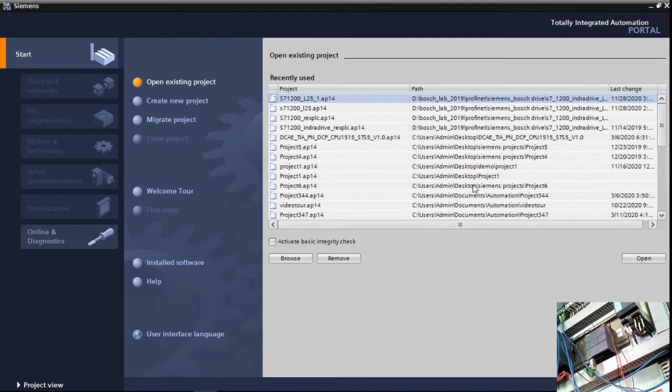So for programming S7-1200 PLC, we use TIA Portal version 14. It's a Siemens software for programming Siemens controllers. So in that we are creating a new project, and this project name we keep as 1200_L25.

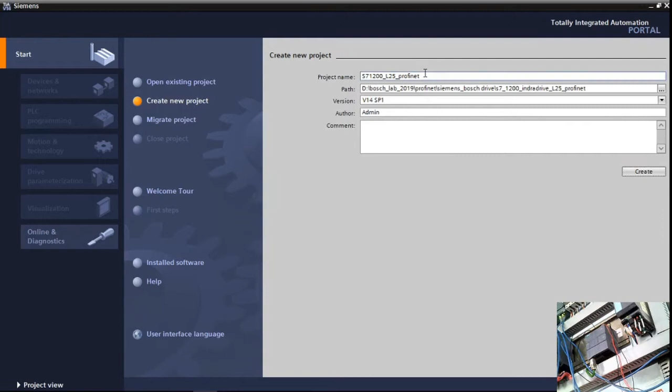So we are connecting a Profinet, then create project with this name. Please click OK, and we'll keep this as Profi. So now we're creating the project.

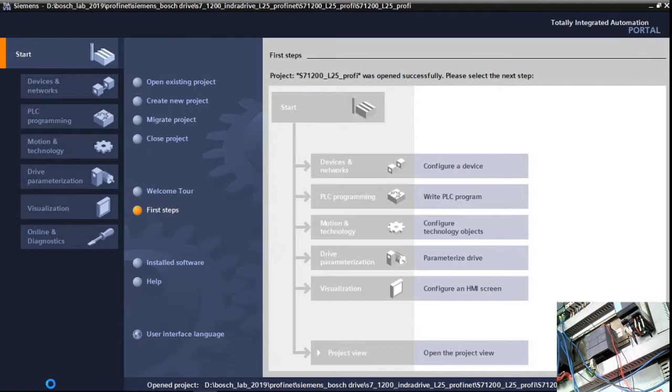So now we go with the project view. We need to add a new device, so now we need to add a 1200 PLC. Under 1200 PLC CPU, our CPU is

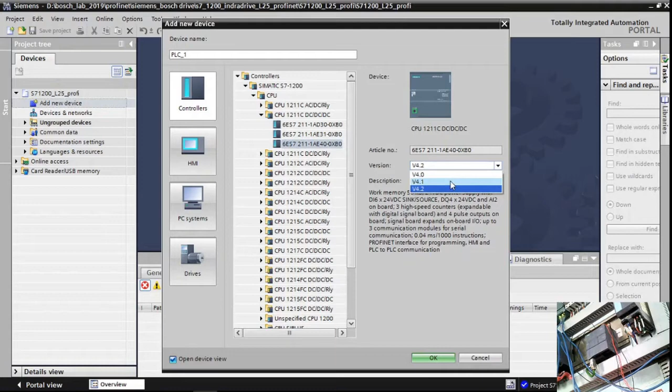1211C DC/DC/DC. This first DC is the DC supply for PLC, DC input and DC output. So select our CPU type number, this one. This will be our firmware, version 4.1. Click OK, and the device will be added in the project.

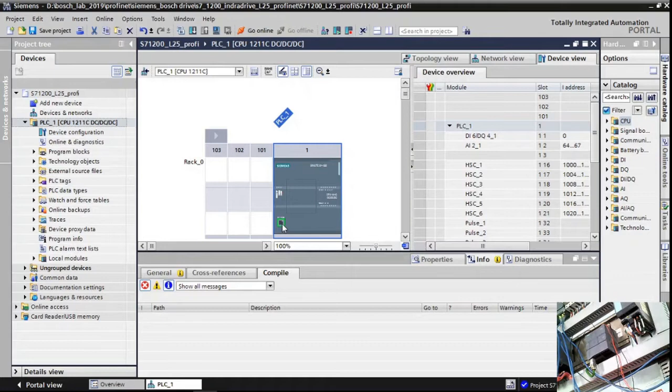So to see the compatibility between our project, the device selected in the project and the actual device, we need to download this into our physical hardware and see whether the selected type number is compatible with the actual one. So for that we need to give the address for this PLC.

So this one is a default address, so now we'll change this, because we are connecting all the devices in a network. So we have a network address of 126. So we can have our own address, but it must not conflict with the other devices.

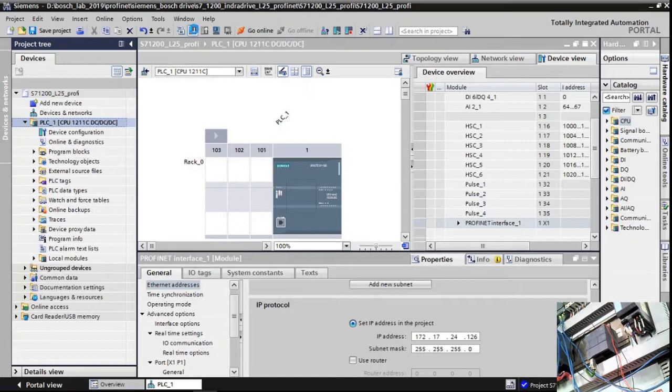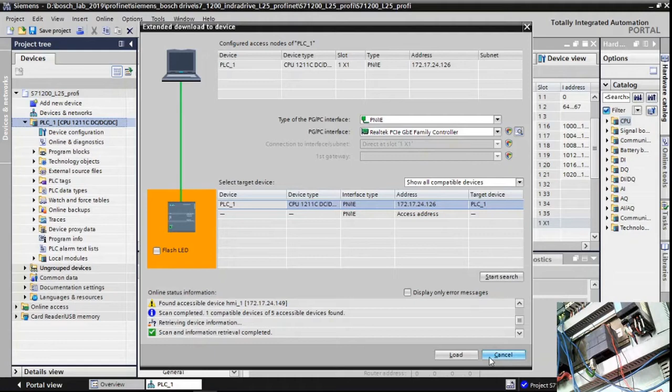So just select this PLC and download. It will ask to search for this PLC. It is 1200, so we will start loading.

Before loading the program, it will ask to stop. We need to stop all the PLC, then we need to load, and then give finish.

Now if we go online, it should show like this. Everything is green. If anywhere some error comes, it won't go online, it will show the error.

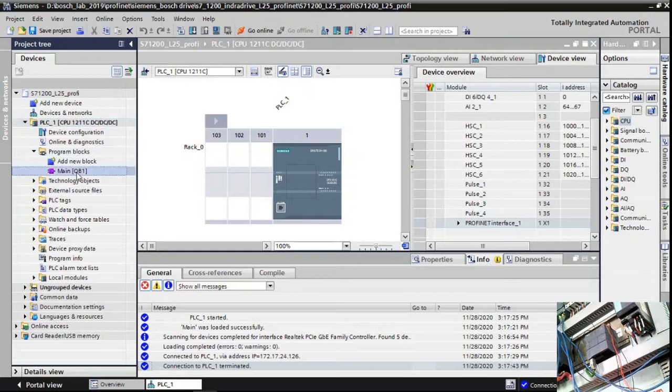So then go offline. In order to do the programming in the PLC, we have PLC program blocks. Go to the main block. In that main block, we have contact, coil and functions. Using that, we can program here.

For example, we use some input and give some output. So this one I can give as M, directly program here M 0.0. Then here I want to switch on some Q 0.0.

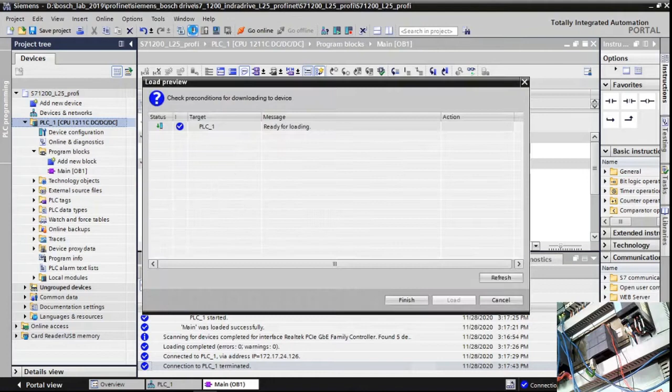So just after this, we can download. Since the device is already loaded, it won't go for that again, as configuration is already done. So it will load only the program and finish.

Then this one is monitoring. Just give this, it will monitor the input output. So this one, we can write a value here. For that we can see the modify: control F2 is from 0 to 1, or control F3 is

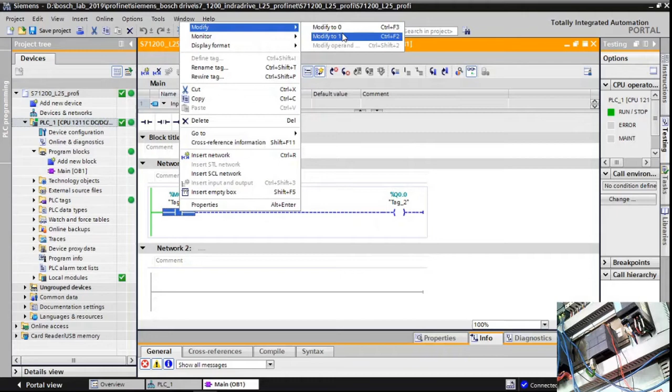from 1 to 0. So if I give control F2 or this one, now see the output is on, right? The PLC also shows the output on. Just this one, control again, PLC network with the

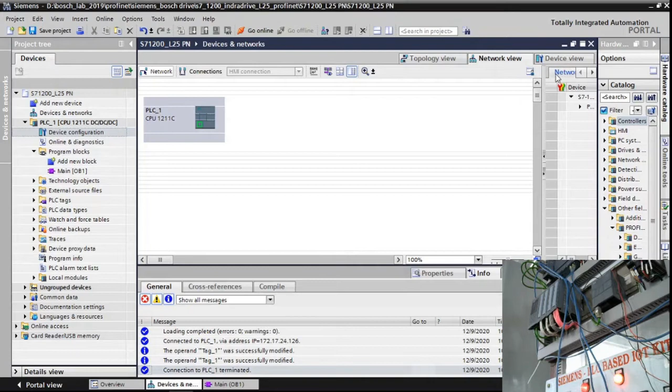1200 PLC. For that, in the network view, we need to add the Profinet device. We use the L25 PN device and we will connect both. So in that, we connected both.

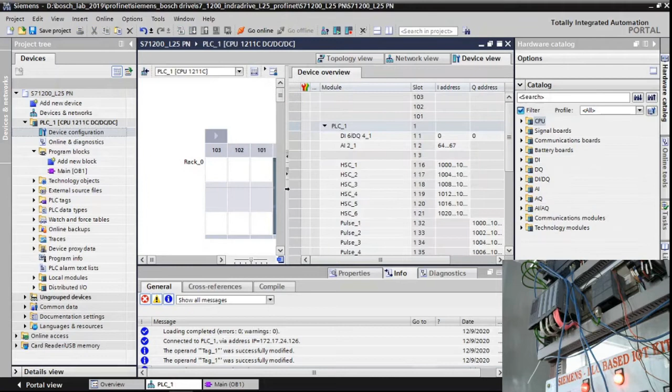So this one, just will check the IP address, whether this one is already having IP address of 126, and this one we can have IP address of both, but they need to be in the same series. We change this to 125.

So then, once all this is completed, we need to download the program. Also we need to add some head module here. Just a double click and we add an input module, this output module. Sorry, it would be added here.

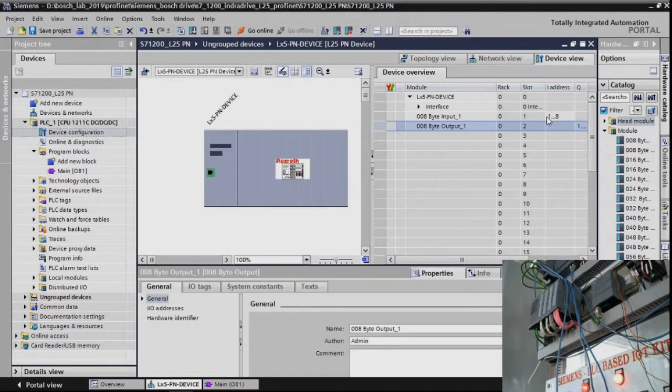So see here the address of the input and output module, through which we are going to communicate with the Bosch PLC. This is 1 to 8. We have a range of input addresses, first byte 8 bytes. Here output also starts from first byte to 8 bytes.

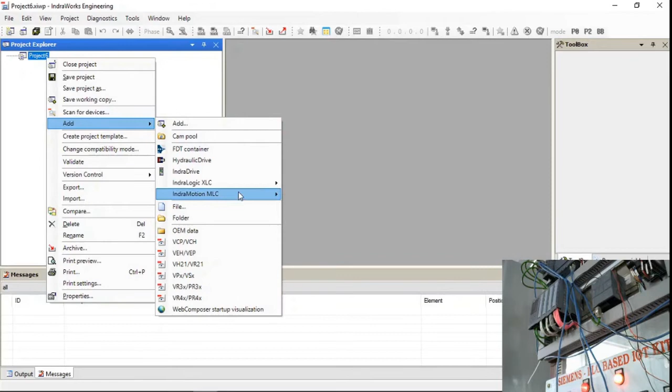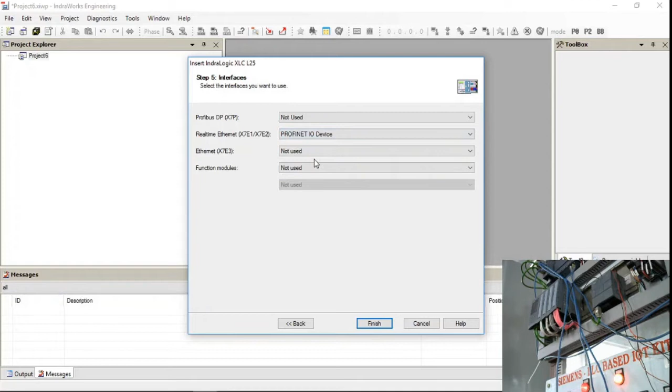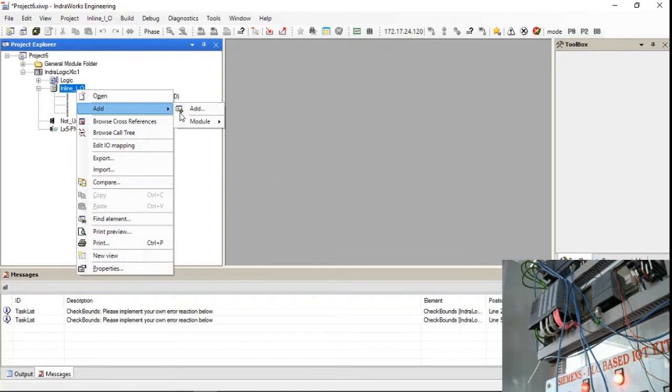Then we'll add all the models. Add model. Then we'll add module DI8HD, then add module DI8HD, then add module DO8HD, then analog input model 2, then analog output model 2.

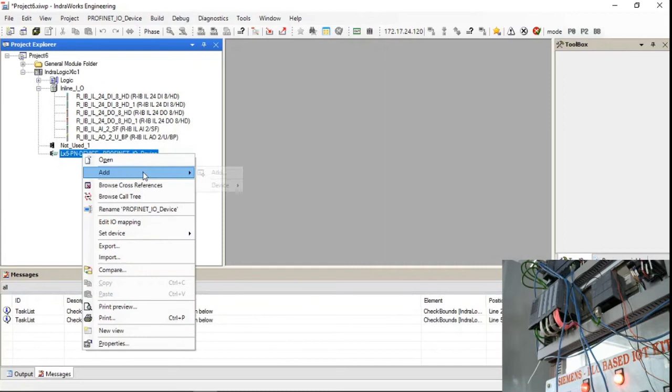So once all the models are added, then the Profinet IO device also we need to add. Here it should be output, next this should be the input. Okay, output, input. So here, this one is like this.

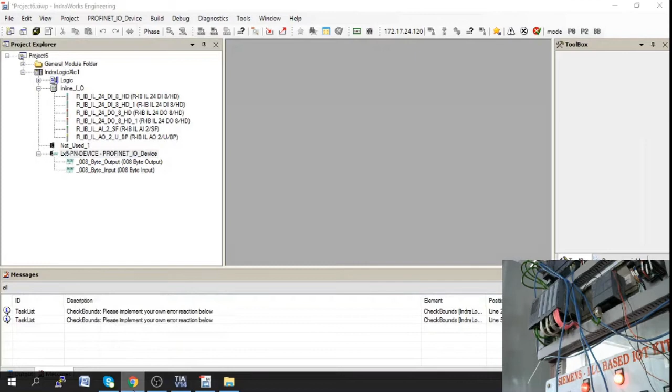This will be Siemens S7-1200. This will be Bosch Rexroth L25 PLC, which uses the IP address 172.17.24.120. So this one uses the IP address 172.17.24.126, and the Profinet IP address 172.17.24.125.

So this Bosch Rexroth Profinet device has the IP address. We added an input model which has address of IB10, QB10. The Siemens Profinet controller acts as a Profinet controller which has input and output address of IB1, QB1.

So now data from the Siemens, we are pushing this data to the QB1 model. From that QB1 model, it starts to share the data here at IB10. Whatever we push here, directly we can take from this IB10, into the controller, and program anything.

Same way, the input or data from the Bosch Rexroth can be pushed into the QB10. From that QB10, data automatically is shared with the IB1. From that IB1 the data can be taken to the Siemens controller and we can do any process. This is how things happen.

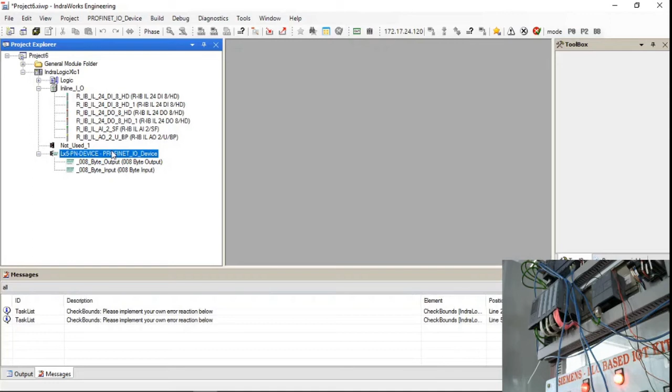So here for the Profinet controller, we need to set the IP address 172.17.24.125, subnet mask 255.255.255.0, and gateway 172.17.24.1. Once this is completed, you can see by clicking this, we know this address is IB QB10. This will be the IO mapping of IB10.

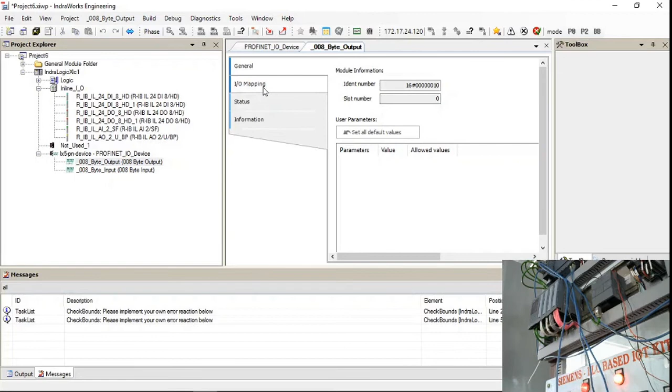So from the logic applications, we write the program. For the input, we take the contact. Whatever data we send, for example, I just send the data using percentage MX 0.0. This data I will give to percentage QX 10.0. So just I push the data here, automatically this data will go to the Siemens IB 1.0.

From that IB 1.0 I can take the data to the output of the Siemens model. Same network below.

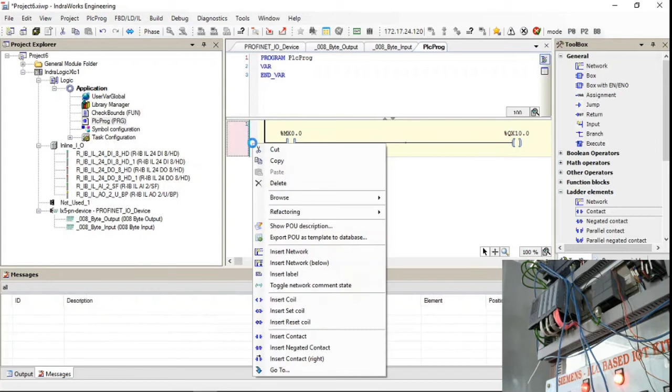So whatever data coming here, it will be available in percentage IX 10.0. From there we can take the data to percentage QX 0.0. So from Siemens, whatever data sent, it will be available here. The data can be taken to QX 0.0.

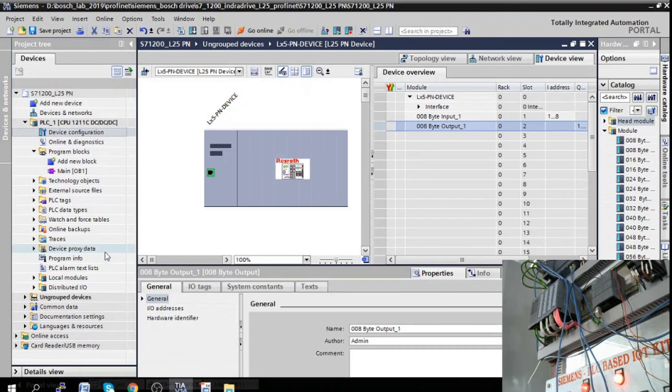So the similar program can be written here also. So here just I push the data to Q1.0. From Q1.0 data will be going to the I10.0 of the Bosch Rexroth. Same way, whatever data coming from QX 10.0 of Bosch Rexroth is available here, that data I will just push into Q0.0.

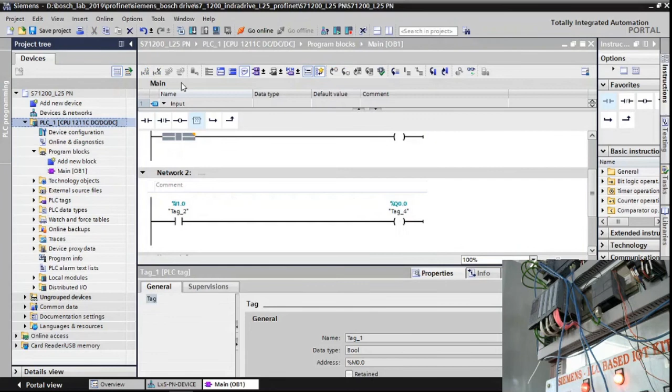So just we will download the program. So we load the program. Load this. Finish.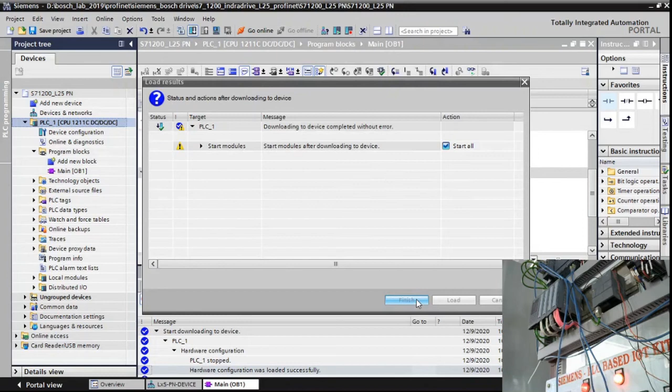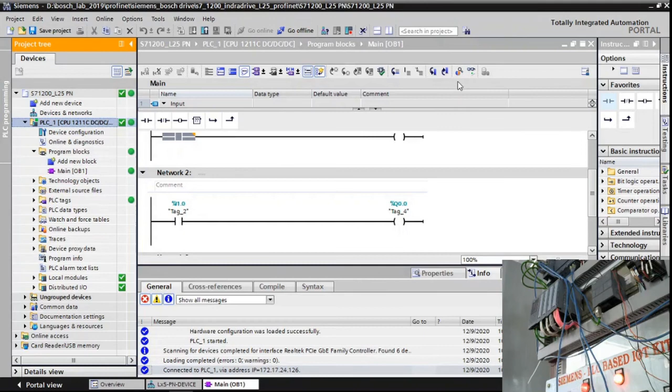So we'll go online. So now everything's fine. So you can see network view device configuration. You can see this tick mark. It shows that everything is communicating properly.

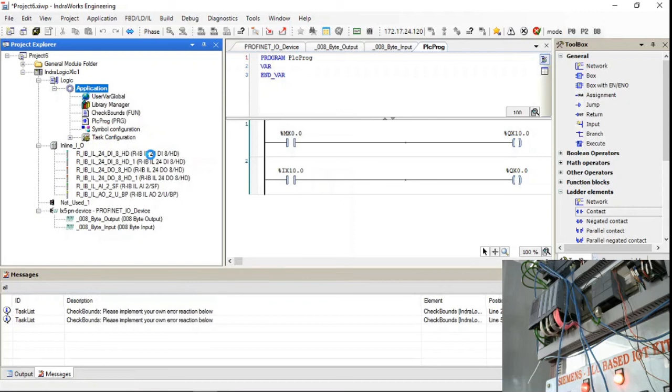Then that Bosch Rexroth also will log in. Yes, yes.

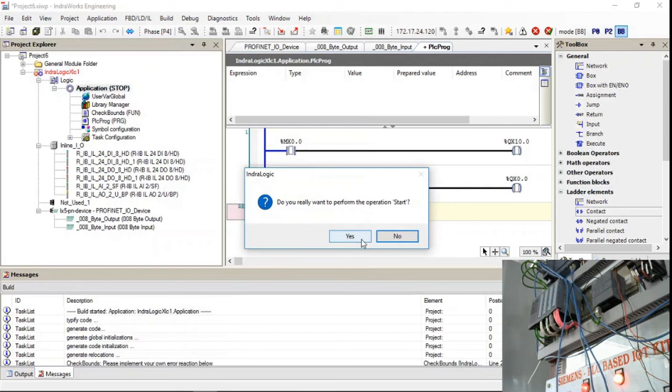So we'll just run this, start model, running. We'll clear the error.

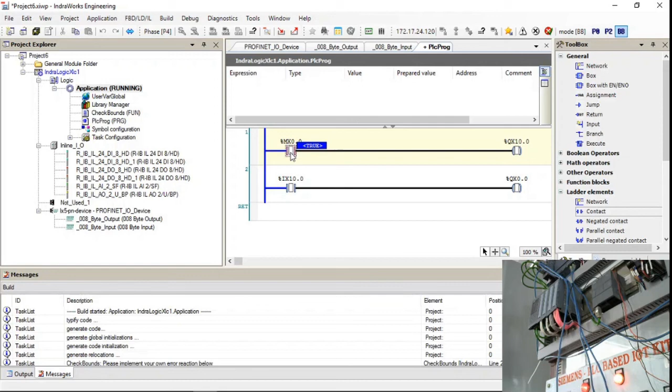So now whatever data I send through the controller, it will go to QX10 of this output module. From that output module, it will be available at the input of Siemens, which makes the output on. So this control F7 makes Q10 on. Now you can see this data is already available.

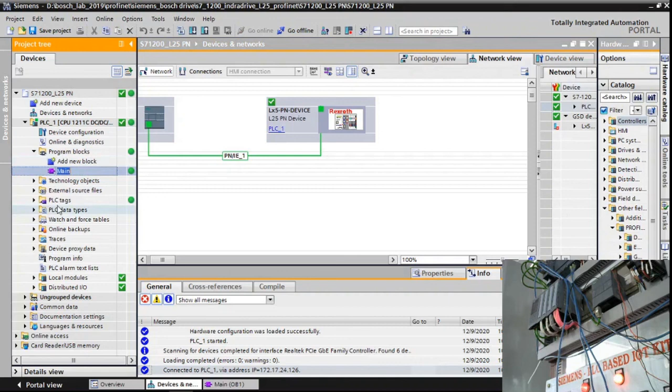Which makes I 1.0 here, the output on. Sorry, not okay. Here we can right click, modify the value to 1. Automatically here 1.0 is on. So you can see automatically that makes this output of this one on.

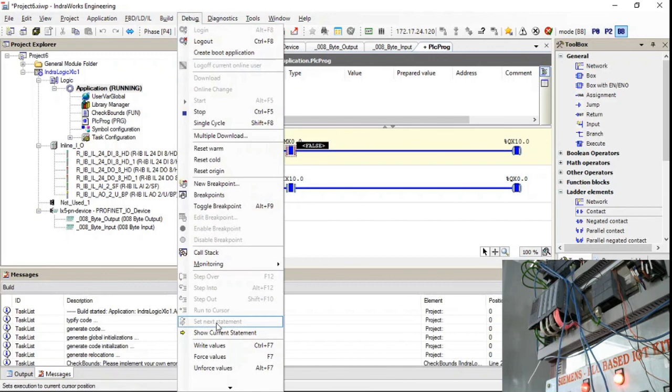Same way if I switch off this, modify the value, so here it goes off, and the Siemens PLC you can see it here also off. Same way if I switch off here, modify the value to 0, so here it is off, and here also it goes off. So in that way we can share the data between Bosch Rexroth and S7-1200 PLC.